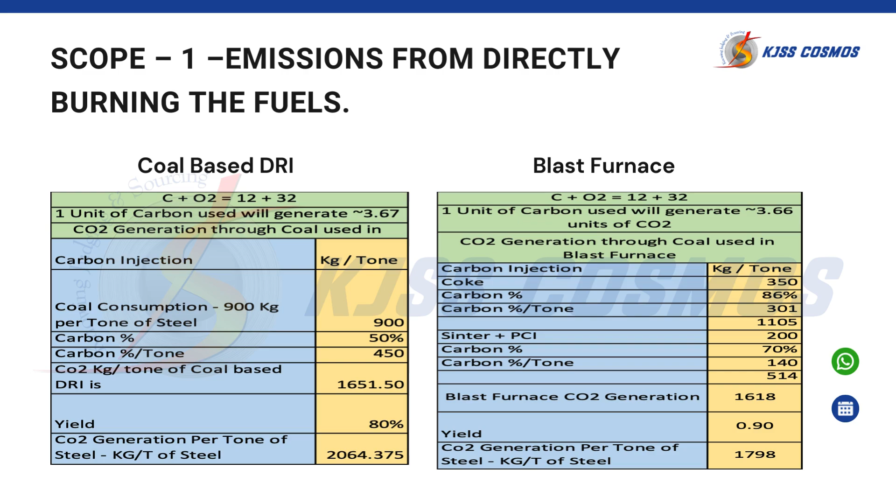This we are discussing right now about scope 1. Basic thumb rule is that if we are utilizing 1 unit of carbon, then we are producing approximately 3.67 units of CO2. So the detailed calculations we have made with all numbers: in the coal-based DRI, to produce the sponge iron, we are generating around 2 tons of CO2. Similarly, if we use the blast furnace, then this CO2 generation is around 1.8 tons for making the crude steel.

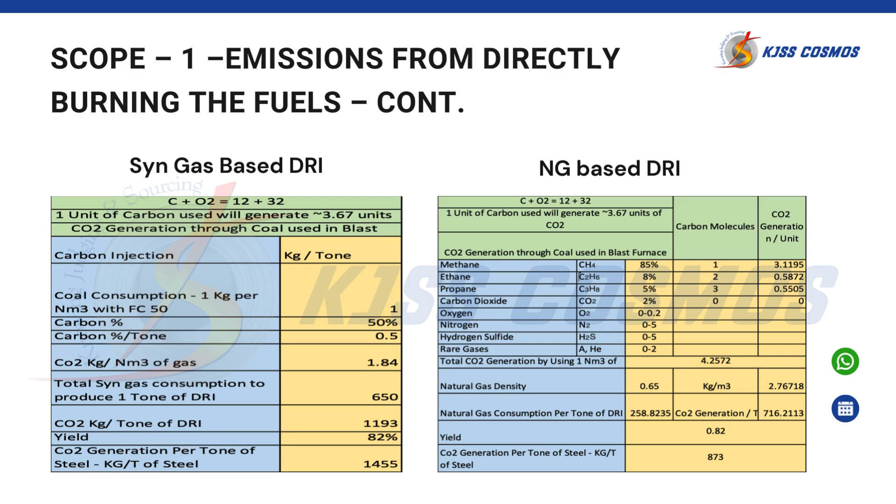And similarly, as in case of JSPL, we are using a syngas-based DRI system that is producing around 1.4 tons of CO2. Natural gas based DRI is producing around 0.87 tons of CO2. That's the number which gives a fair idea which process is producing how much CO2, and the complete calculation is explained here. In case anybody has any query with respect to the calculation part, he can connect with me anytime.

And this is scope 2. Basically, scope 1 is with respect to the fossil fuel consumption. Scope 2 is with respect to the power we are utilizing. Like, we are producing around 720 grams of CO2 by using 1 unit of electricity. And this number is like 370 grams in case of USA.

So the difference there is, in case of USA, the power they are producing is mainly through nuclear power and others, so the CO2 generation is much lesser. So whatever we do, if we want to compare ourselves with the Americans or European or big Chinese partners, their CO2 generation through power is much lesser than us.

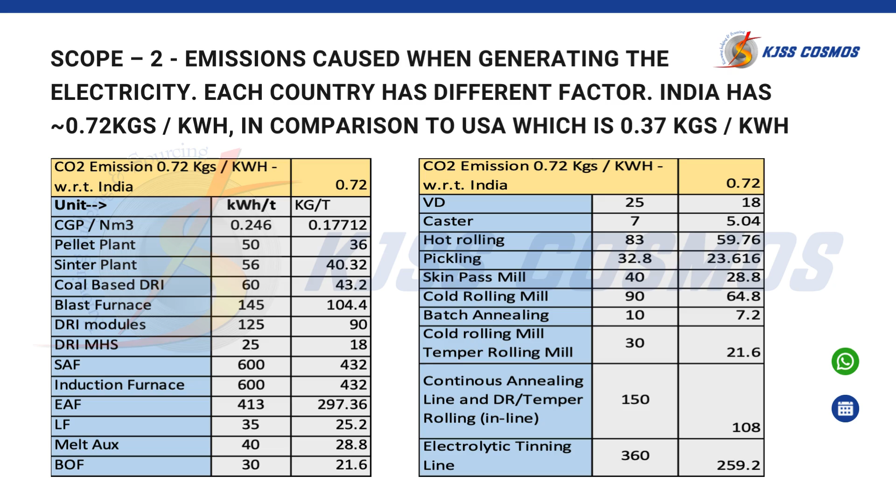So here I have briefed about how much is the estimated unit consumption process-wise and how much CO2 we are producing through which process, so that we can have a specific calculation for our own plant, like how much CO2 I am generating. If I am utilizing pellet plant, sinter plant, coal-based DRI, blast furnace, whatever modules we are using, just add those numbers and you will get how much CO2 is being produced through scope 2. Basically the overall CO2 production in any plant is the sum of scope 1 plus scope 2 plus scope 3.

Scope 3 is mainly on the transportation part. For producing say 1 ton of steel, I need to import around 3 times the raw material. So that raw material coming into the plant, and selling the product, how much fuel consumption has happened - that's also adding to the CO2.

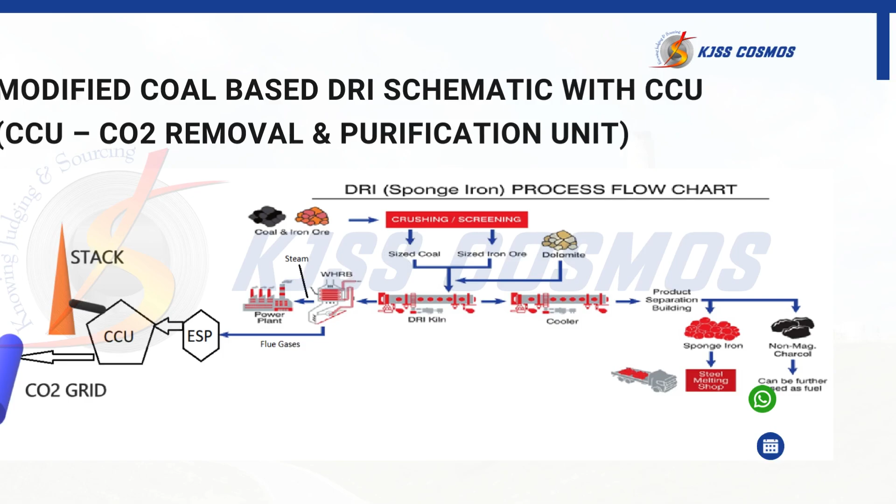So what we are suggesting is we should concentrate on the carbon capture unit. I'll explain why - once we discuss the capex and opex of different processes, other than coal-based DRI and blast furnace, the other processes are not very economically viable. So nobody is going to pay extra for a steel that has less carbon production in that process.

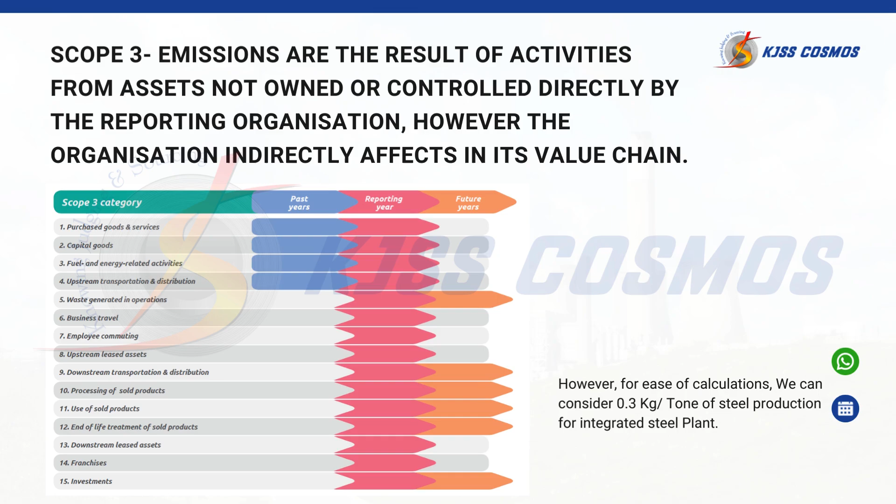CO2 capturing is not a big deal. At present, amine-based solution technology is being used in Tata and JSPL. But what are we doing after capturing that CO2? We are emitting it to the environment again. In none of the plants are we utilizing this CO2 either in the steel plant or liquefying it, or producing products, as mentioned by Mr. Chaudhary, where CO2 is a raw material. So there is good possibility to utilize the CO2 - capture it, liquefy it, and utilize it.

Similarly, there are other technologies from China, like pressure swing adsorption and others. For that, we also have some tie-ups with universities in China, and they are doing a lot of experiments on utilizing the steel plant CO2 within the steel plant itself. That also we will explain.

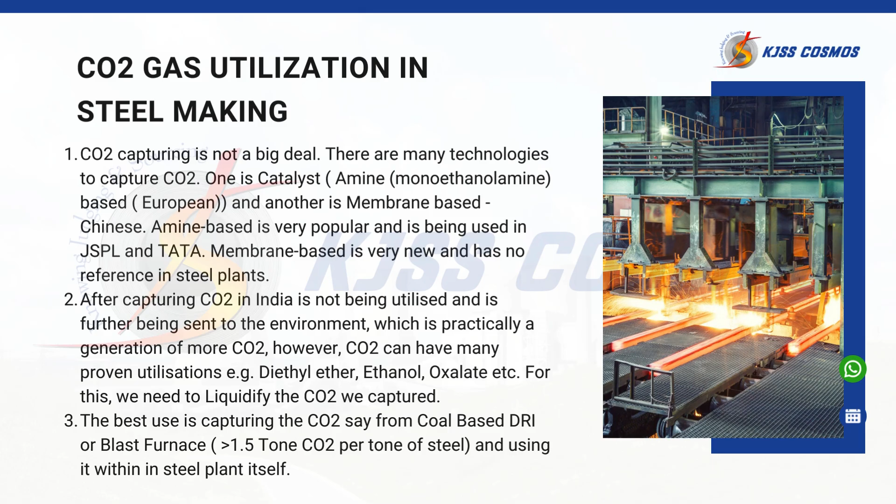In China, basically 3-4 plants like Jingtang with a 300-ton BOF, Jiuquan Steel, Shougang and others are utilizing and doing a lot of experiments on utilizing CO2 within the steel plant. So here I will be presenting their results and the problems they are facing, and we suggest that the steel industry should come together and do this kind of experiment and develop their own technology before we need to buy commercially from China.

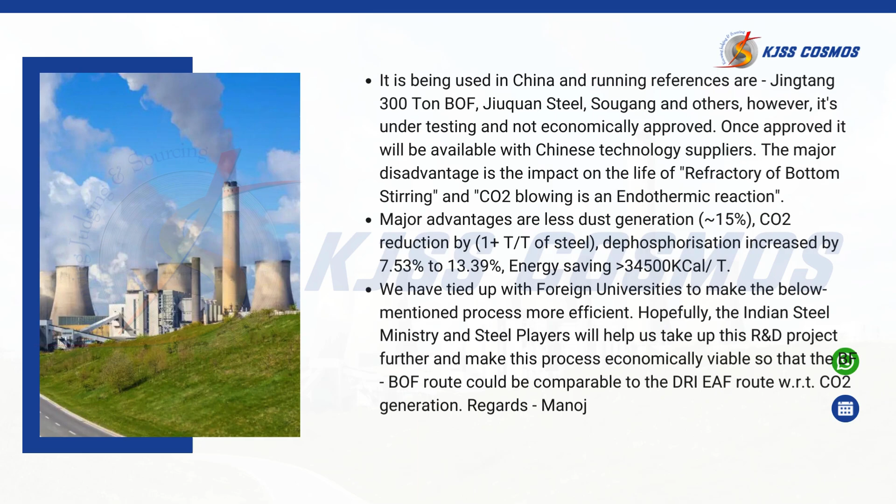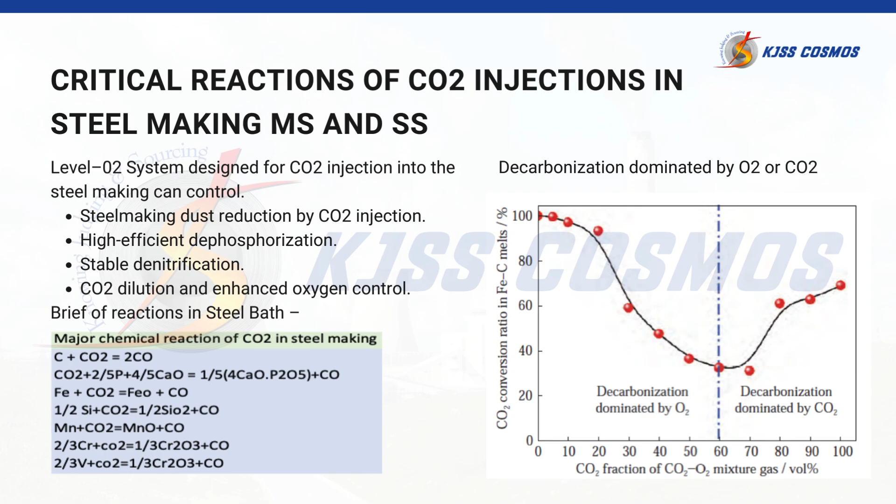This is basically the results of the CO2 utilization in the steel plant, how their results are coming. All this data was collected from the universities we had tied up with for utilizing and capturing this CO2 in the steel plant.

Now I'm sharing the capex and opex - CO2 production cost, capturing cost is coming around $14.5 per ton of CO2, and capital cost, if we need to set up a plant of 29,000 nm³ per hour CO2 capturing system, that will cost around $9 million US. CO2 product will be around 3,680 nm³ per hour, power consumption will be 3 megawatts. These are just capex and opex of the CO2 capturing system if we go with pressure swing adsorption technology.

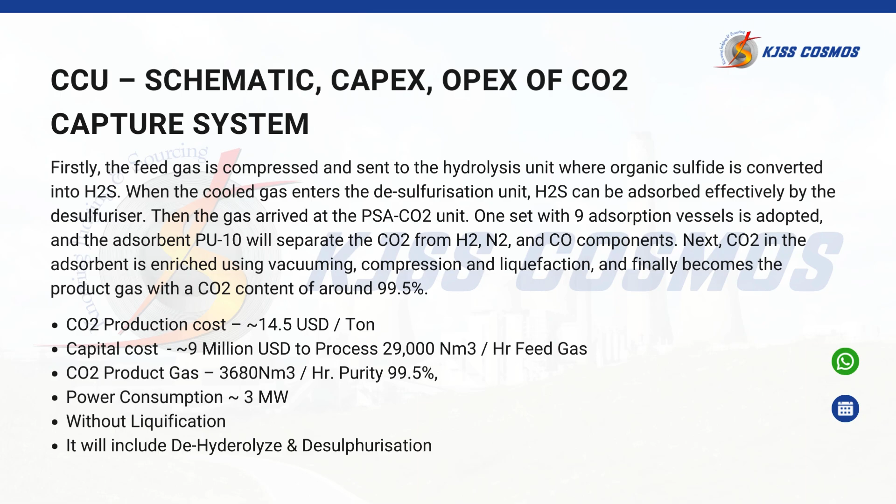It is going to be the future of the steel industry that all processes will capture CO2. If we aim to be CO2 neutral, there is no other way possible that I can see at present. Maybe in future we may get other things, but this is the most viable solution I feel, studying different processes.

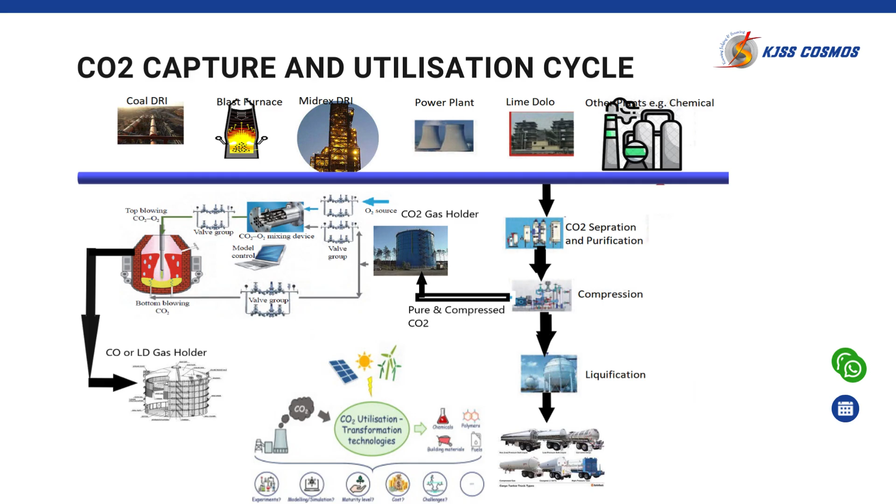So you can see in this process, the minimum capex is on the blast furnace and BOF route, which is around $1.8 billion compared to capex on the coal gasification route. And hot rolled coil manufacturing operational cost is $431, not including interest and depreciation, just the pure operational cost. If we compare it with the CGP route, then it comes to around $513.

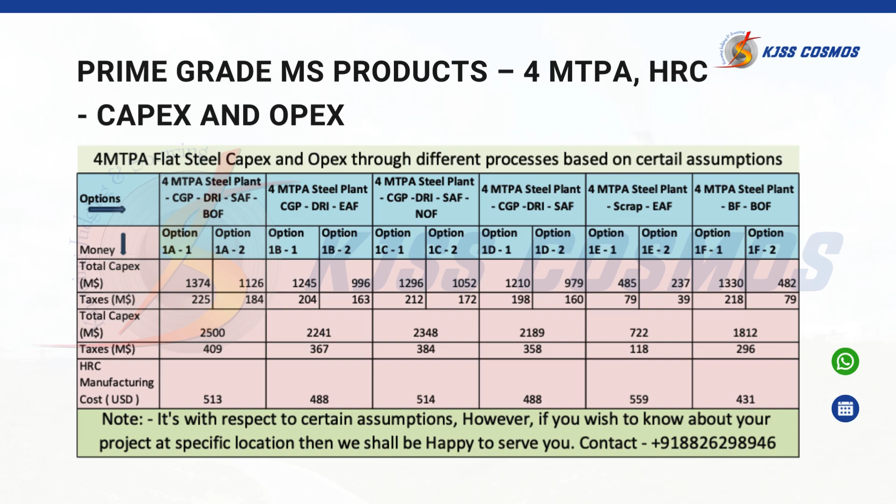So capex is lesser, opex is lesser, so why should people go for the process where, if the government is not giving any benefits, there is no advantage of going on that, because an entrepreneur will always think on the numbers which is more economical. So here I have put up all kinds of processes and their capex as well as opex for information. In case of any query, you can contact me anytime.

That's the reason, like Chaudhary sir said in the beginning, why everybody is putting up blast furnaces. Why is everybody concentrating only on the coal-based DRI system? That's the main reason.

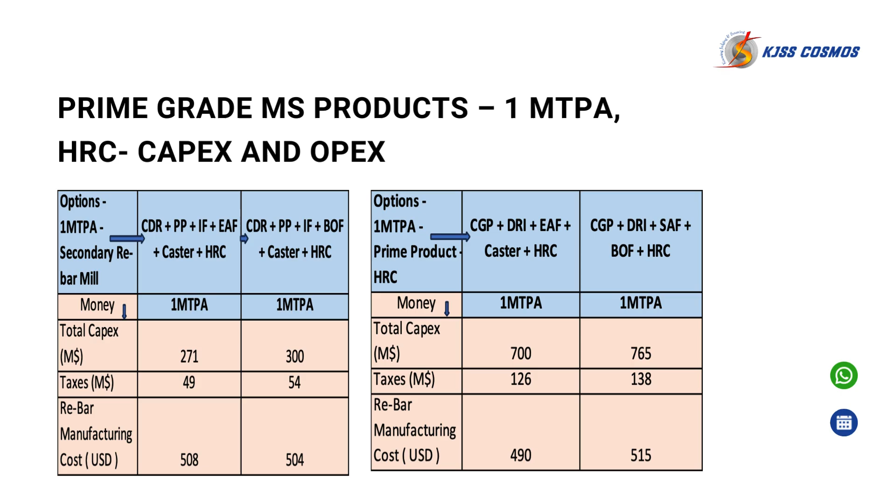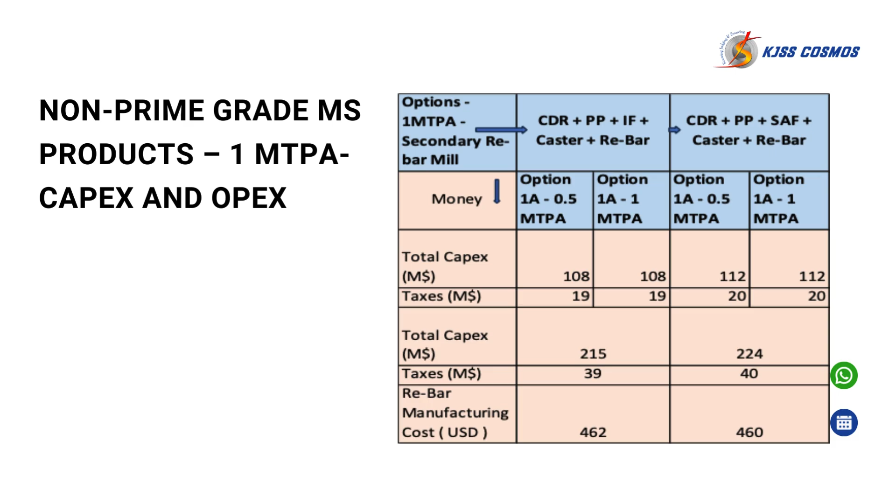So by looking at all these things, there is good sense in carbon capturing and utilizing it within the steel plant, or liquefying it. Within the steel plant, I have data from different plants on what kind of problems they are facing, since it's an endothermic reaction - the refractory gets damaged very frequently, and there's a mushrooming effect within the liquid bath. These are the problems being encountered right now by universities in China.

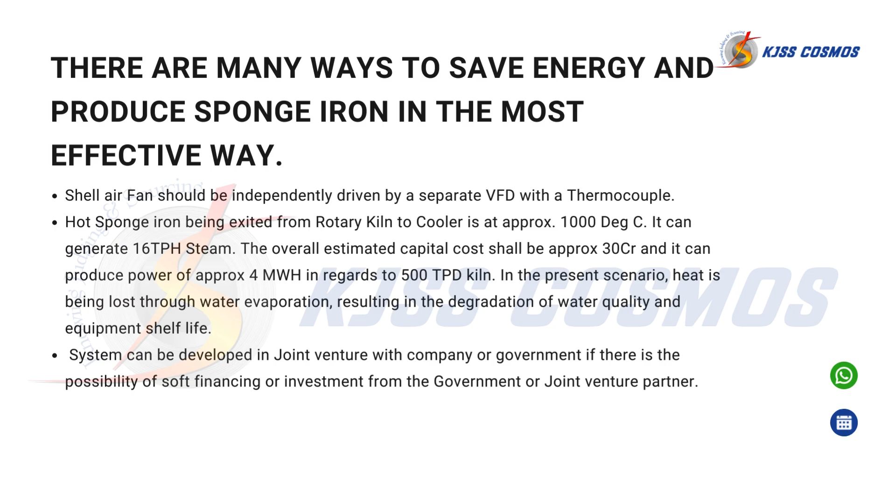So there are many ways to save energy and produce sponge iron - I was mainly concentrating on coal-based DRI. Like the shell air fan, which should be independently driven by VFD. And hot sponge iron exiting from the rotary kiln, as I mentioned earlier - if you're cooling with water, you're wasting the heat in the water, so it's better to utilize that heat.

Its IRR, or return on investment, is less than a year. So that's showing the principle of induction melting. I think everybody knows about it.

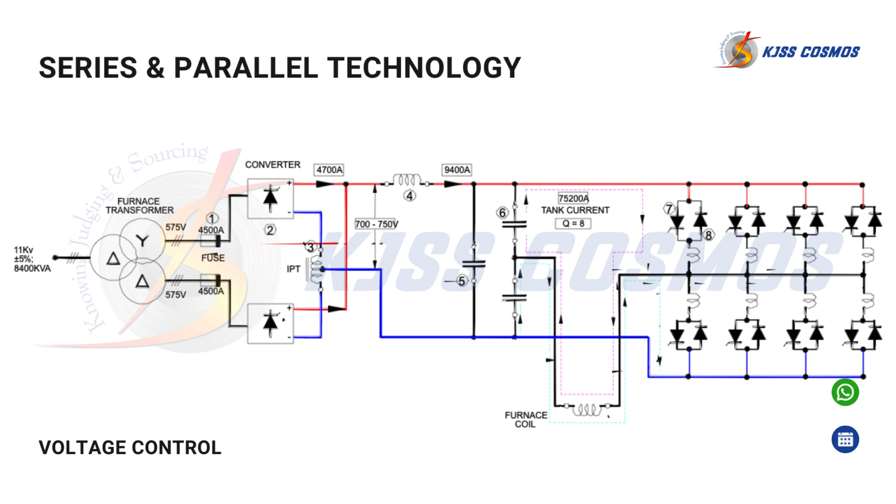These are the different induction furnace technologies, like current control and voltage control, series and parallel. Whenever we are going for a precise kind of thing, we should go with voltage control, like in a foundry. But if you're producing steel, then we should go with current control. There are pros and cons, benefits and advantages and disadvantages of different technologies.